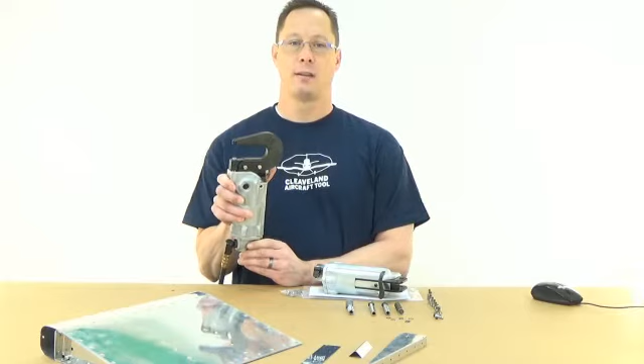This is an example of the pneumatic squeezer, and it squeezes rivets, and it also squeezes dimples. Now, most people think of it as a rivet squeezer, but I'd like you to think of it more as a dimpling tool, because you use it way more for dimpling than you do for squeezing.

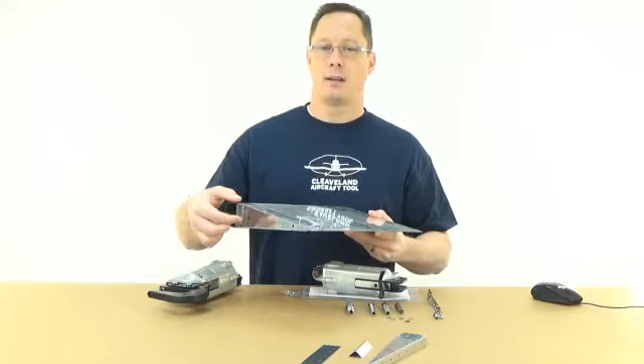So on this example practice project here, you can see that along an edge you can squeeze all of those rivets. You can go along. The yoke gets into the tight space there and can squeeze the rivet much more controllably and predictably than using a rivet gun.

However, all of the substructure of the airplane can be done with the squeezer. So you can squeeze dimples into the entire substructure. So almost every rivet on the airplane, half of it is done with the squeezer, and the other half is done with the C-frame for the large sheets where you can't get the squeezer into.

So think of it more as a dimpling squeezer than a rivet squeezer. It's a dimpling squeezer that you can also rivet with.

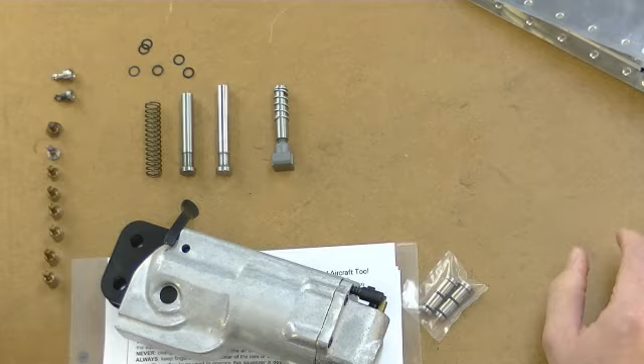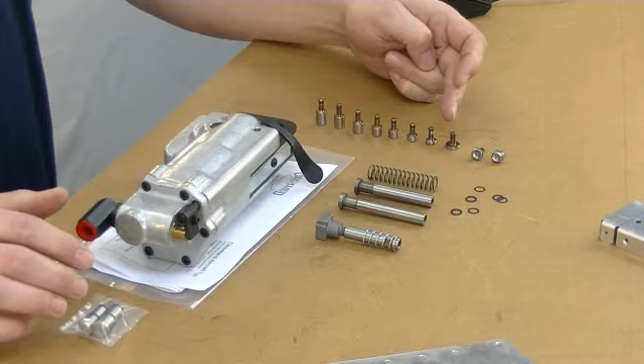Okay, so let me switch cameras here, and I'm going to give you a little tour of some pieces that we have here. So this is the squeezer body right here. These are different rams. These are different flat sets and cup sets that you use for the squeezer. And I'll get into why there's so many different pieces and how they're used here in just a second. But let's start with the squeezer body itself.

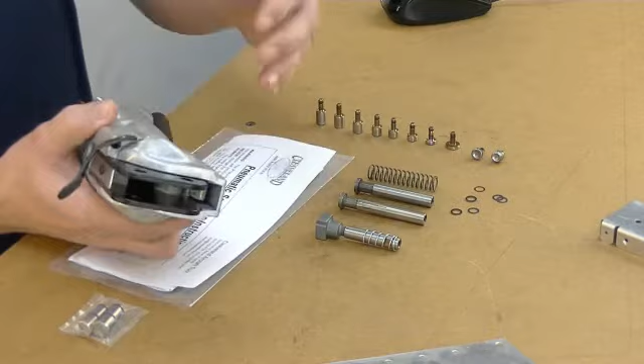So we sell the squeezer body with different yokes. There's different shapes of yokes that you can get for different applications. The 3-inch yoke is the most common, and then the others are less used. And I have some other videos on choosing the right yokes and where you use different yokes, so you can check those out. The 3-inch yoke is the most common.

So we sell this in a couple different ways. We sell it as a squeezer kit, and we sell it as the body only, and then you can choose the yoke or yokes that you want. And the reason I'm pointing that out is a couple different things. First of all, the squeezers that you get from most other places will come with what's called a fixed ram.

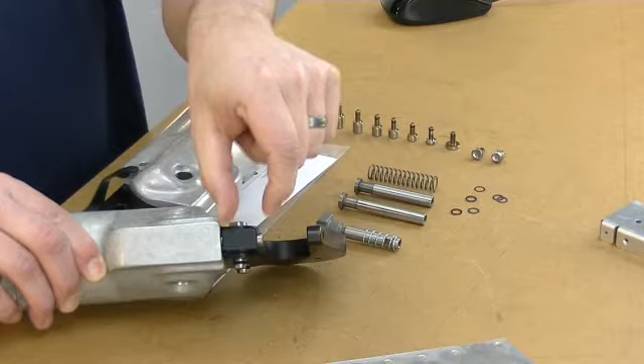This is not adjustable. It's a given length here, and there's two different rams that are commonly used for two different yoke thicknesses. And by yoke thickness, I'm talking about the thickness of this portion right here that the ram goes through. So this is a 1-inch thick base. There's also a 1 1/4 inch thick base. So depending on which one of those you have, depends on which one of these you need.

So if you're ordering a body only, you will get the standard short fixed set holder, and that's what you get from most other companies as well. So this will go into the squeezer. That's what actuates up and down to squeeze your rivets. And because that is fixed, you will need to adjust the length of your tooling by using the different lengths of sets. And each one of these is a set. This is a set. It's to set rivets.

That's another commonly misunderstood point of dialogue. So this is one cup set. This is another cup set. This is not a set. Technically, I suppose it would be a set of sets. But each individual is a set because it's used to set rivets. So let's see, where do I go from here?

So there's also an adjustable ram that has a threaded portion. I'm sorry, I used the wrong term. I said set too many times. You can make the ram longer or shorter by rotating it in and out. So this is a threaded piece. This eliminates the need for a lot of these.

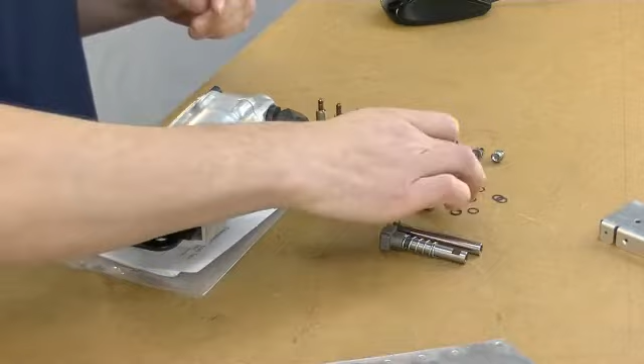So let me get into the instructions that we send along with the kit. And these are downloadable if you bought a used one or made the mistake of buying it from someone else. We can get these for you.

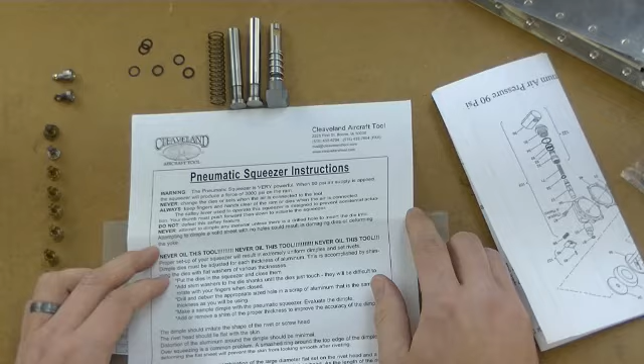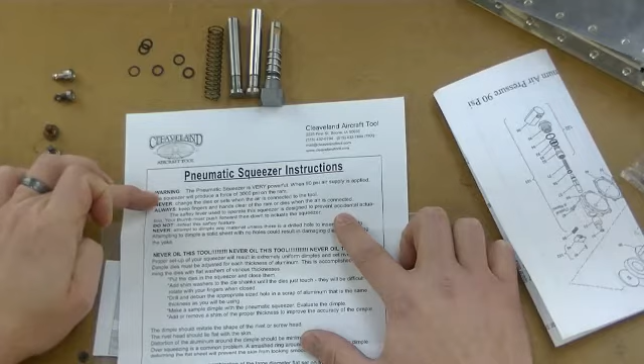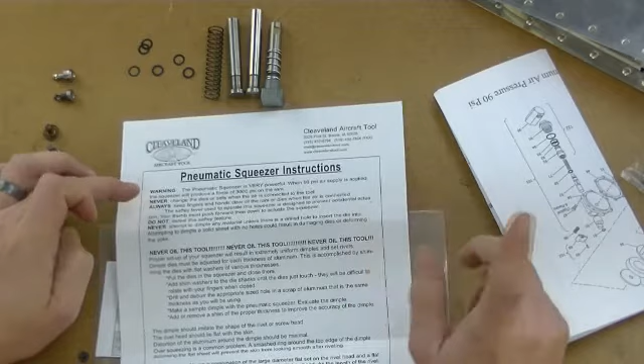There we go. The first page that comes with the squeezer is a set of instructions. And the first thing it says is, don't squeeze your finger. It puts out 3,000 pounds of force at the end of the ram, which is like parking your car on top of your finger. So keep your fingers out of there. Whenever you adjust it, unlike what I just did, unplug the air from it so that you don't get your fingers in there. So never change the dies when it's connected to air.

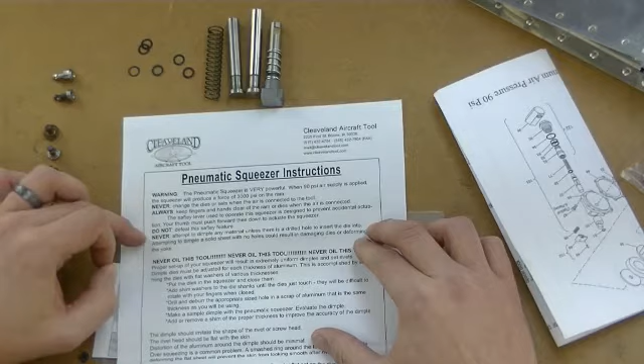And there is a safety feature on the tool. You'll see here. What that does is it makes you push up on the lever for the ram before you can rotate it in. So that has an Allen screw and you can adjust it up, but then if anything touches the trigger, it will actuate. So you don't want to adjust that.

And the next most important thing that a lot of people don't understand is you never put air tool oil in this tool. So most air tools, you would put a couple drops of air tool oil in the inlet, plug the air back on, and then that oils the tool. This tool has, let me switch to this parts diagram here. This tool has a leather piston here that goes up and down in the cylinder. That piston has a grease on it.

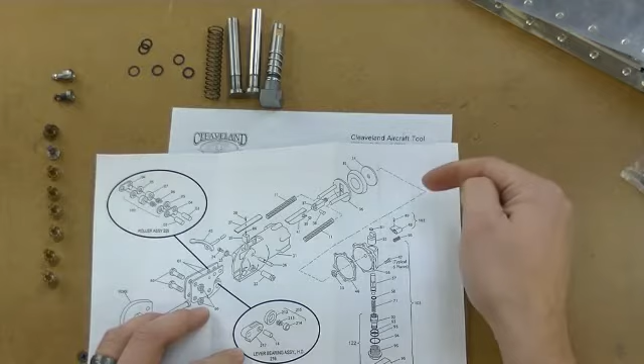So if you were to put air tool oil in this, it dilutes that grease and then will lose pressure over time. So this is the only air tool that I know of other than paint guns that you don't put any oil in. Never oil this tool. Permanently greased, so that's not a problem.

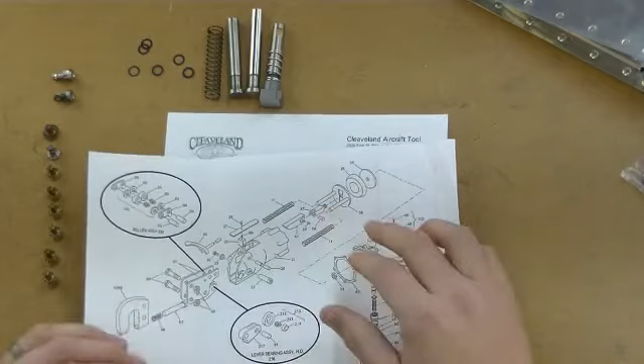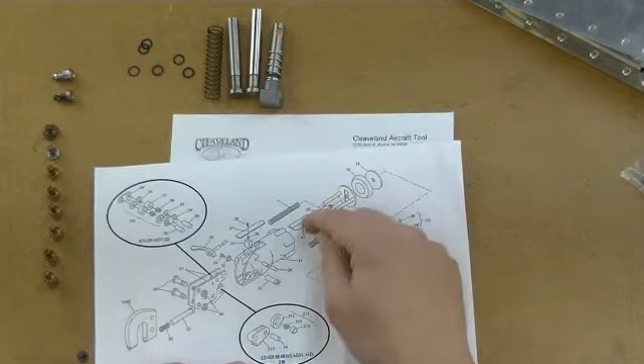Okay, so the next thing that people don't understand often is there is a ramp on the end of this piston that goes up and down. There's a ramp, or I call it a ramp, so that has a couple different angles on that. And that ramp pushes on a cam, which is shown here. So when you actuate the tool, the first part of that ramp is to really get a lot of motion and to get that ram up to where you're going to work. And then the angle changes so that you get more mechanical advantage.

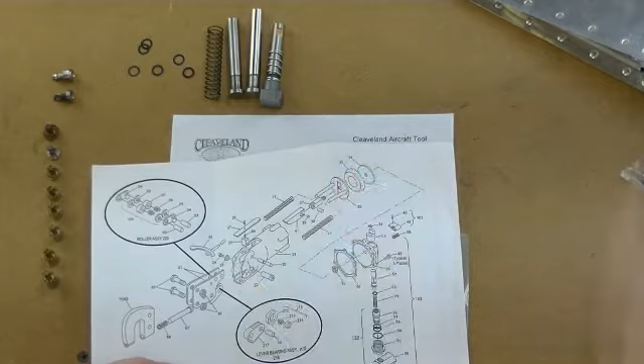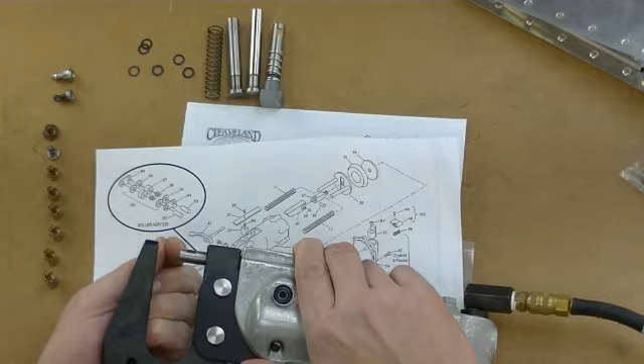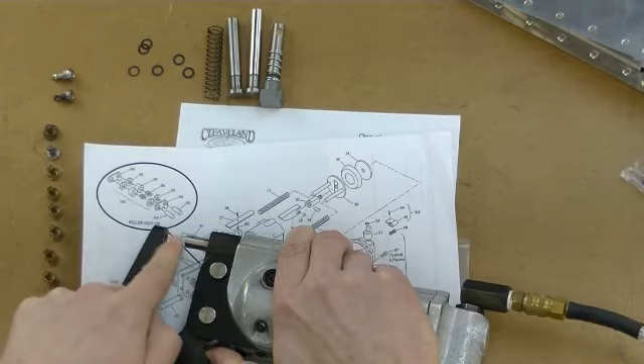And so as you squeeze this, the first part comes up fairly quickly to the rivet, and then the last 3/16 of an inch is what develops all the power. So I'm holding it here so I can put my finger up here to show you. The last 3/16 is the only place that you're going to get power out of the squeezer. Before that, it's just the motion to get it up to where the rivet or the dimple, where the work's going to be happening. So it's very important that you get this gap set up correctly if you want to be able to use the power of the squeezer.

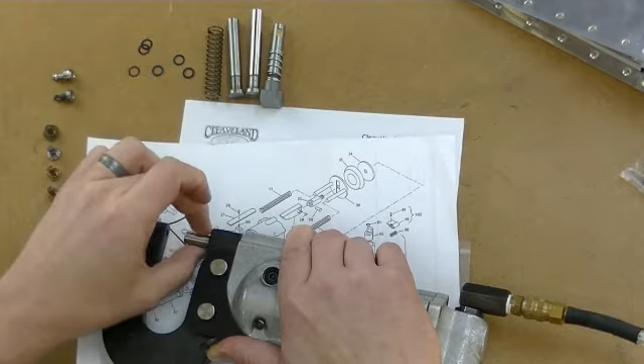Very, very common question for us. A high percentage of the time people that buy squeezers will call and say, I got this squeezer and it won't squeeze rivets. So we have some instructions on that online as well. But the tendency when it won't squeeze rivets is to tighten this up, to make the gap less so that it will squeeze. That's exactly the opposite of what you want to do. It's counterintuitive. So you want to increase that gap here so that the ram will travel further and develop power.

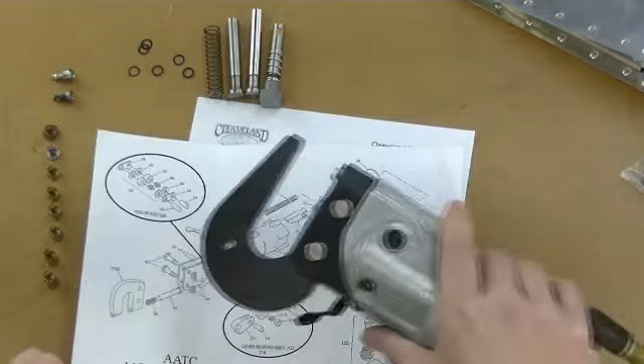I hope I did that explanation well, but the reason I'm explaining this is it's important that you get that gap set correctly, or it will not develop the power. So get this out of the way.

So in doing that now, we need to set this gap. And that's the difference between the fixed set holder and the adjustable set holder. With the adjustable set holder, you can just rotate it to adjust, as I've been doing, up and down, and that changes your gap. Oh, I did want to show one more thing that comes with it.

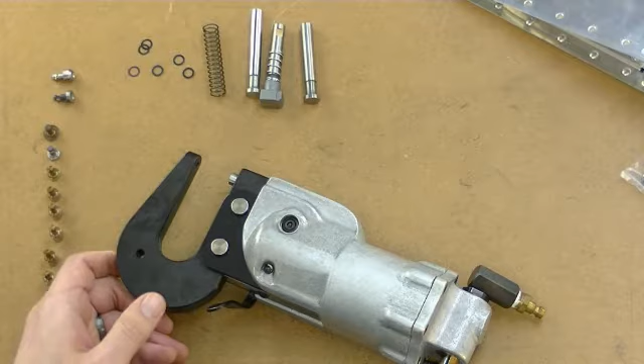Well, there is a table that comes with this that has rivet lengths and then the mathematically correct gap to set this up. So you can measure it with a caliper or with a ruler to see if you're about right for, if you're squeezing a -4-3 rivet, you can see what that gap is supposed to be.

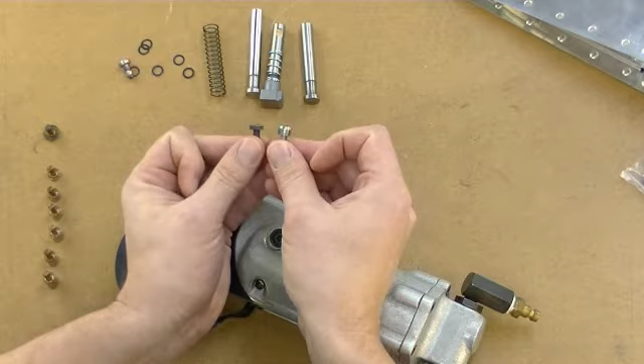So then we have cup sets and we have flat sets. You use 2 flat sets for setting flush rivets. You use a cup and a flat to set the universal head rivets. The reason that we have 2 different lengths here of cup sets, with the pneumatic squeezer, again, it's limited in travel. So to do a lot of the longer rivets, you need to have as much travel as possible, which necessitates using a thinner set.

So this is an 1/8-inch thick cup set. And again, if you buy the squeezer kit from us, this is what we supply so that you can get those long 1/8-inch rivets. More commonly in the market, you'll see 1/4-inch long cup sets. So again, it gives you an extra 1/8 of an inch length rivet capacity if you use a short cup set.

Okay. So then again, there's 8 different lengths of flat sets that we sell, plus the one for doing flush riveting. And the reason that we've sold those is traditionally, before adjustable rams were made, you had this fixed set. So to set this up, let's say you're doing a flush rivet, and it's about, I don't know, 3/8 of an inch long or so. So you would pick your dies. I'm just going to pretend like the set that's in there is a fixed set. You would pick your dies, or your flat sets, and you would set them up.

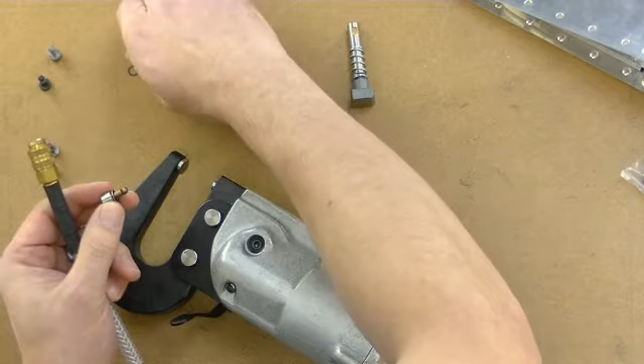You would squeeze, and you would look at that gap. And if it's a -3 rivet, let's say the gap is about 3/8 of an inch, and you need it a little bit less than that. Then what you do is you come back and you take the flat set out and you put in shim washers. And we sell these shim washers in a set of 6 that comes with 3 different sizes, and I don't recall exactly the thicknesses, but you can adjust them to about 5/1000ths of an inch with these shim washers.

So you put the shim washers in, you put your set back in, you look at your gap and you go, yeah, that looks about right. I'm going to try a rivet. So then you squeeze a rivet and you see if it's right or not. So if you went to squeeze the rivet and it came up to the rivet but didn't crush it, you have to take thickness out of here. You have to make the gap wider so that it gets to that power portion of the cam and will actually squeeze the rivet. If it's not squeezed enough, then you add more shim washers to it.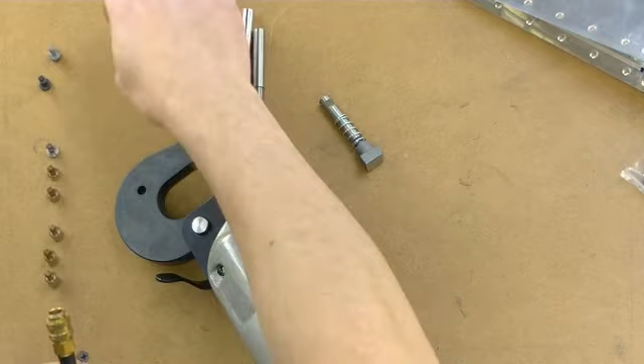So that's the way we built our RV-4 back in the late 80s, and it was the common way for 50 years until these adjustable sets came out. So as you're thinking about the fixed set versus the adjustable set, you can see that it's much, much quicker to just rotate that ram than it is to mess around trying to figure out which washers you need and which flat sets you need.

So again, if you do have a squeezer with the fixed ram, or let's say you bought our kit and decided you didn't want to have the adjustable ram, then we could put that back in there. It's a little bit cheaper, like I said. But then you need all 8 flat sets, and you need the shim washers to go with them.

If you have the adjustable set, all you need is the flush set for flush rivets, and then, let's see, I think with the pneumatic squeezers, it's the number 2 and the number 4 cup sets we send it with, and then the thin flat set. So you eliminate the need for all the other lengths of tooling to go with the squeezer.

So I hope I did that justice in describing that. And I described how you set it up for squeezing rivets, but I didn't touch on how you set it up for dimple dies. And really that's quite easy. All you do for dimple dies is put the male die and the female die in the tool, and then put your air on, actuate it, and then with this adjustable ram, you just rotate it up until they touch with no material in between, until they're tight, and it won't rotate anymore. That's set up correctly for dimpling.

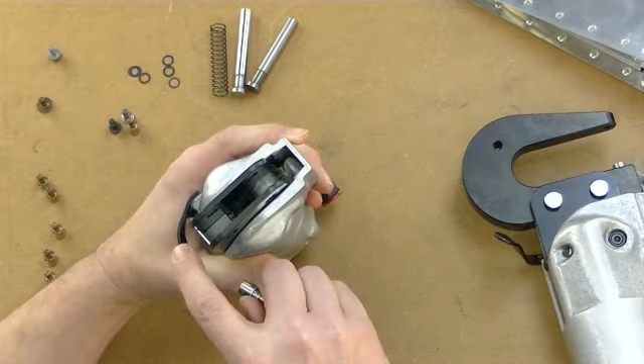One more thing that people will sometimes get confused about is how this adjustable ram goes into the squeezer. So you see the cam there that runs up and down. That's on the opposite side of the trigger. This particular adjustable set holder can only go in one way. We sometimes sell a different one that we make in-house. This one's made by Bob Avery at Avery Tools. So this is a forged piece so that it has to go in one direction. Ours you can actually get in exactly backwards.

There's a kind of a tapered side that goes toward the center of the squeezer. Ours, you can get in backwards, and then if you go to put the yoke on, the pins will not go through. So if you are installing your adjustable set holder and you can't get the pins to go through the yoke, that's what's wrong. Just take the set holder out, turn it 180 degrees, and put it back in.

Finally, occasionally we get people that will buy either imported squeezers because they look exactly the same and they're cheaper. Why not, right? Or rebuilt or used, just used up squeezers. And so I wanted to do a little demonstration on the trigger here. I'm taking the safety off by pushing up and then just squeezing slightly. As you do that, you'll hear the air start to hiss, and then as you give it more pressure, you'll see the ram start coming up.

So that should be very controllable up and down. You should be able to come right up to the rivet and get everything set exactly the way you want it before you squeeze it. And so you can hold it there without any pressure really on the material, and then give it the full pressure when you're ready to squeeze.